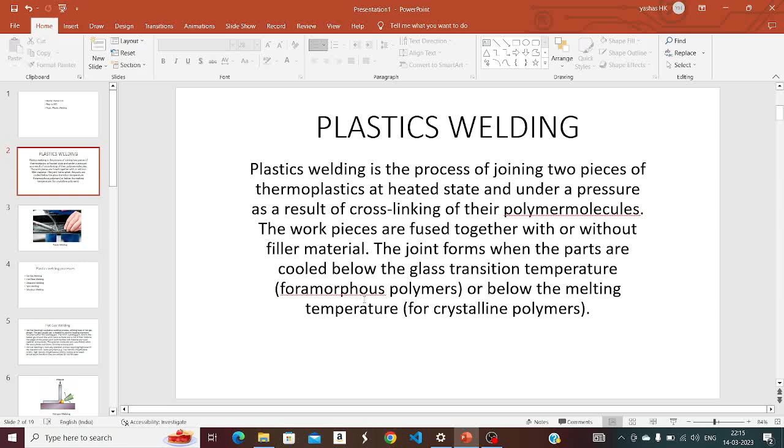Plastic welding is the process of joining two pieces of thermoplastics at a heated state and under pressure, as a result of cross-linkage of their polymer molecules. The pieces are fused together with or without filler material. The joint forms when the parts are cooled below the glass transition temperature for amorphous polymers, or below the melting temperature for crystalline polymers. This is how plastic welding is made.

There are five types of plastic welding: hot gas welding, hot plate welding, ultrasonic welding, spin welding, and vibration welding.

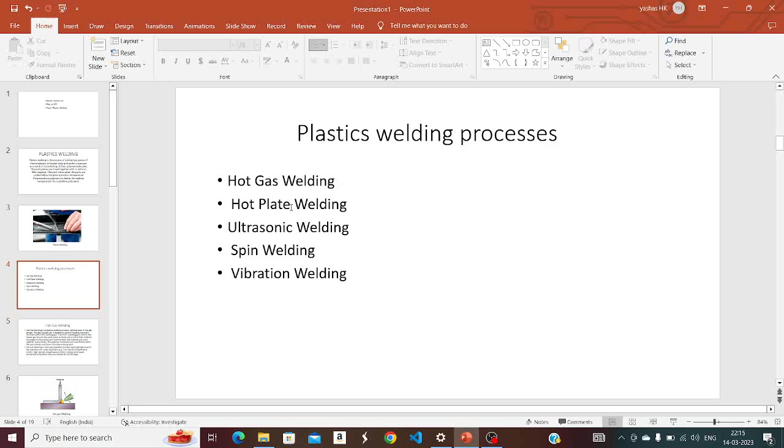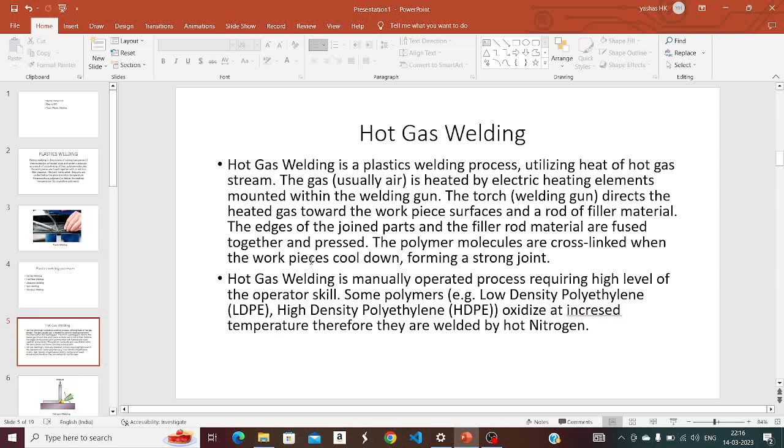Hot gas welding is a plastic welding process utilizing the heat of a hot gas stream. The gas, usually air, is heated by electric heating elements mounted within the welding gun. The torch, or welding gun, directs the heated gas towards the workpiece surfaces and the filler rod material. The edges of the joined parts and the filler rod material are fused together and pressed. The polymer molecules are cross-linked when the workpiece cools down, forming a strong joint. This is how hot gas welding is made.

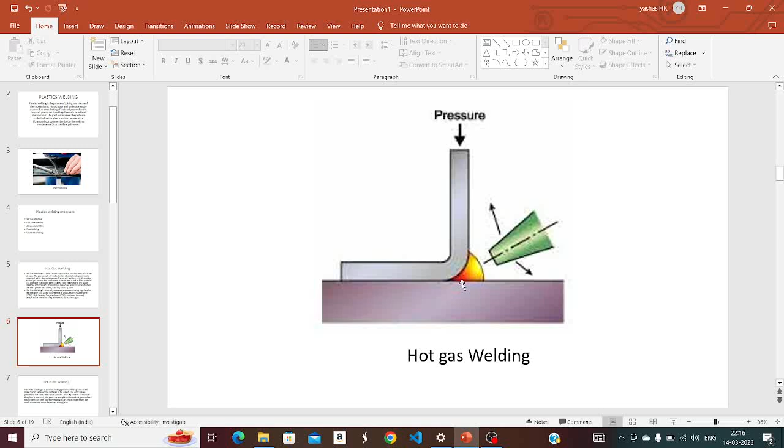So let's go to the second type of welding.

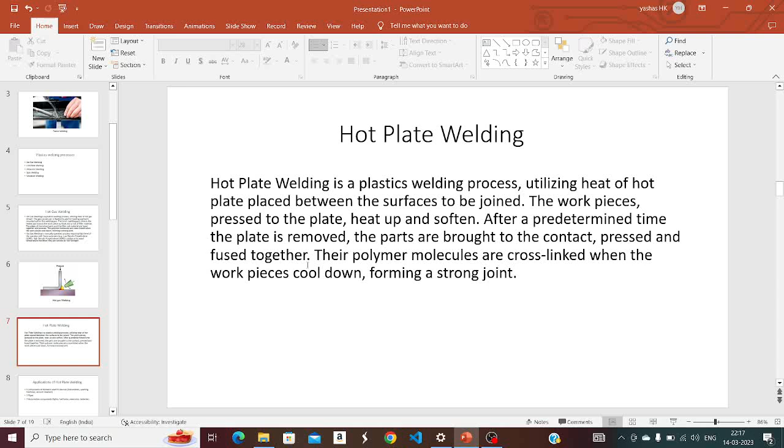The second type of welding is hot plate welding. Hot plate welding is a plastic welding process utilizing a hot plate placed between the surfaces to be joined. The workpieces pressed to the plate heat up and soften. After a predetermined time, the plate is removed. The parts are brought into contact, pressed and fused together. Their polymer molecules are cross-linked when the workpieces cool down, forming a strong joint.

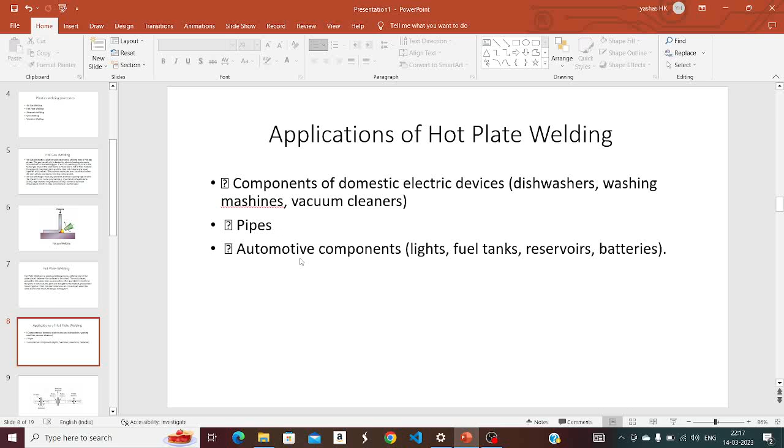Some applications of hot plate welding: it is used in components of domestic electric devices like dishwashers, washing machines, and vacuum cleaners, it is used to fuse or make contact with pipes, and it is also used in automotive components like lights, fuel tanks, reservoirs, and batteries, and many more.

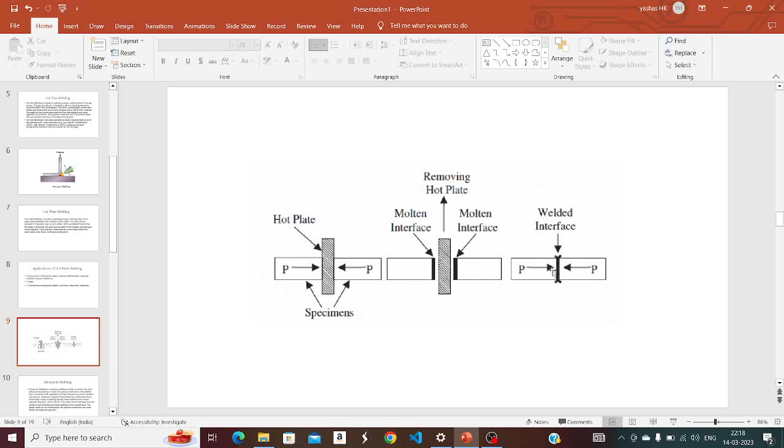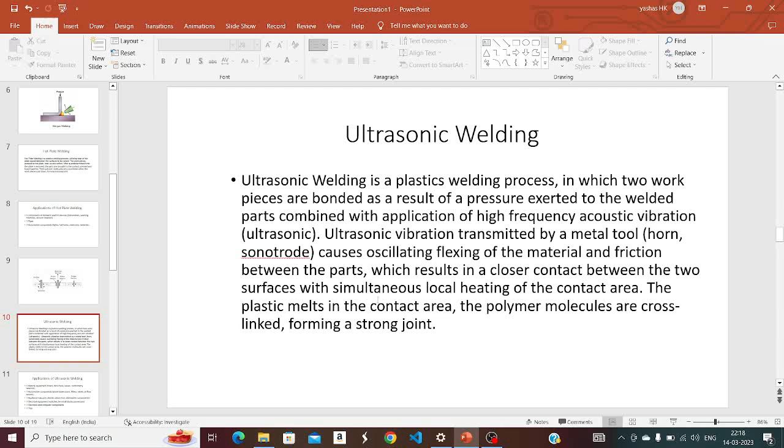The third type of welding is ultrasonic welding. Ultrasonic welding is a plastic welding process in which two workpieces are bonded as a result of pressure exerted on the welded parts combined with the application of high frequency acoustic vibration, that is ultrasonic. Ultrasonic vibration transmitted by a metal tool, or horn, or sonotrode, causes oscillating flexing of the material and friction between the parts, resulting in closer contact between the two surfaces with simultaneous local heating of the contact area. The plastic melts in the contact area. The polymer molecules are cross-linked, forming a strong joint.

Some applications of ultrasonic welding: it is used in medical equipment such as filters, face masks, valves, and cardiometry reservoirs, and it is also used in automotive components like glove boxes, doors, filters, valves, airflow sensors, and appliances such as vacuum cleaners, steam irons, dishwasher components. It is also used in electrical equipment like switches, terminal blocks, and connectors, and also in electronic and computer components, and toys.

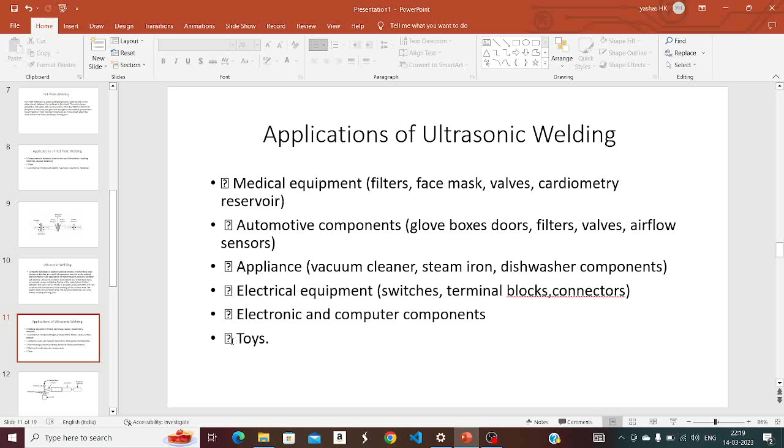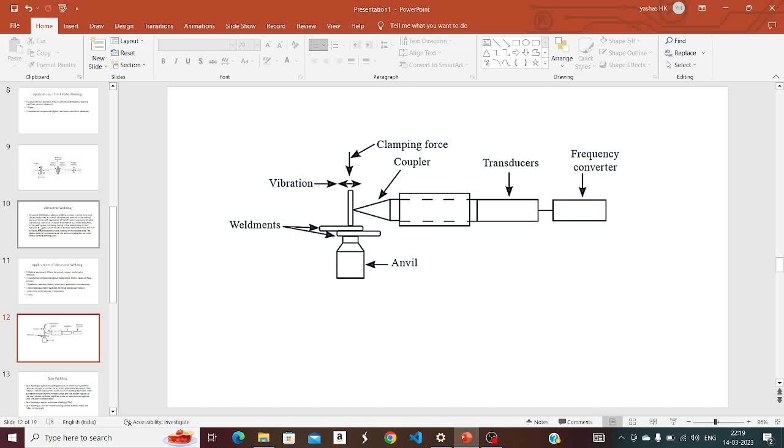The next type of welding is spin welding. Spin welding is a plastic welding process in which two cylindrical parts are brought into contact by friction pressure, with one of them rotating. Friction between the parts results in heating their ends. After a predetermined time, the rotation stops and the molten regions of the workpieces are fused together under axial pressure applied until the joint is cooled down.

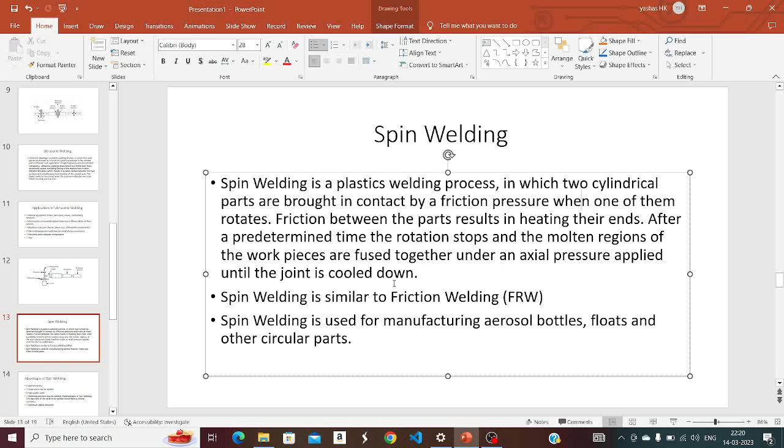Some advantages of spin welding are reproducibility, large parts may be welded, high quality welds, and oxidizing polymers may be welded.

Some disadvantages of spin welding are: at least one part of the welded pieces should have circular symmetry, and a minimum rigidity is required.

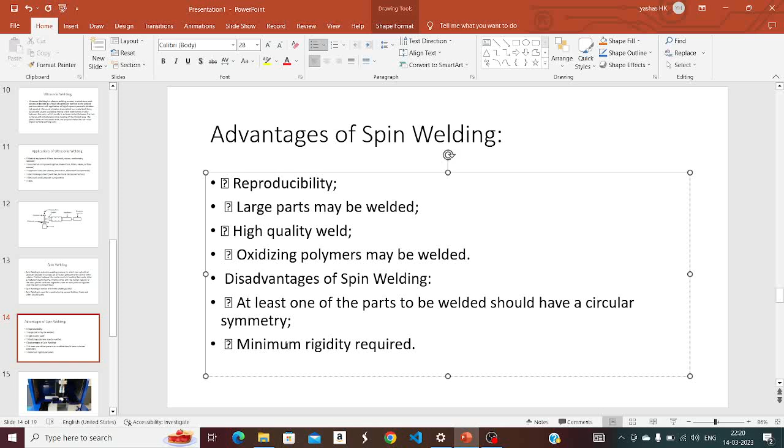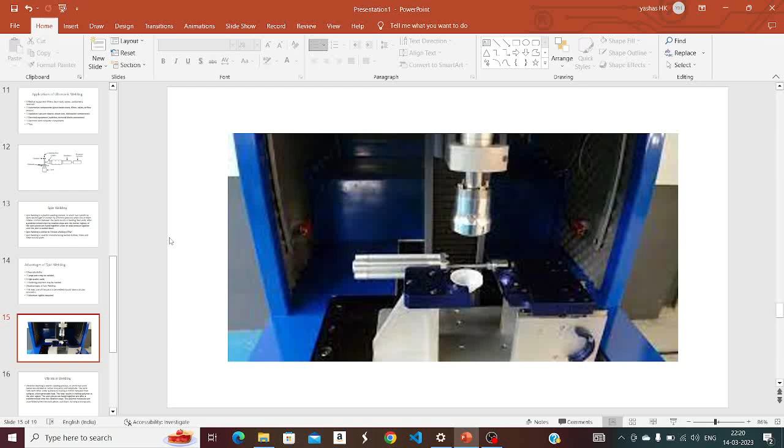The last one is vibration welding. Vibration welding is a plastics welding process in which two workpieces are vibrated at a certain frequency and amplitude. The parts rub each other under pressure, causing friction between their surfaces, which generates heat. The heat results in melting polymer in the joint region. The workpieces are fused together, and after a predetermined time, the vibration stops. The polymer molecules are cross-linked when the workpieces cool down, forming a strong joint.

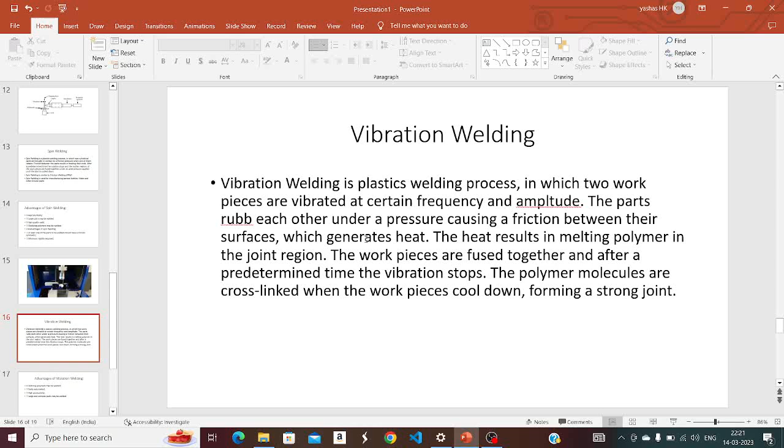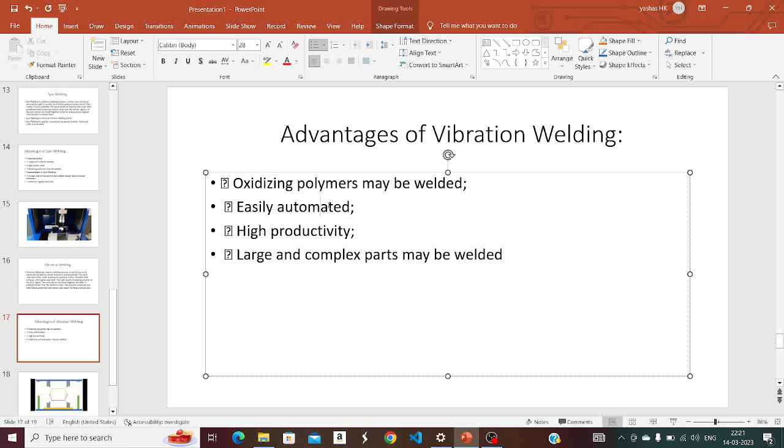Some advantages of vibration welding are: oxidizing polymers may be welded, it is easily automated, high productivity, and large and complex parts may be welded.

This is a video representation showing how, by friction, the welding happens. This is how vibration welding works.

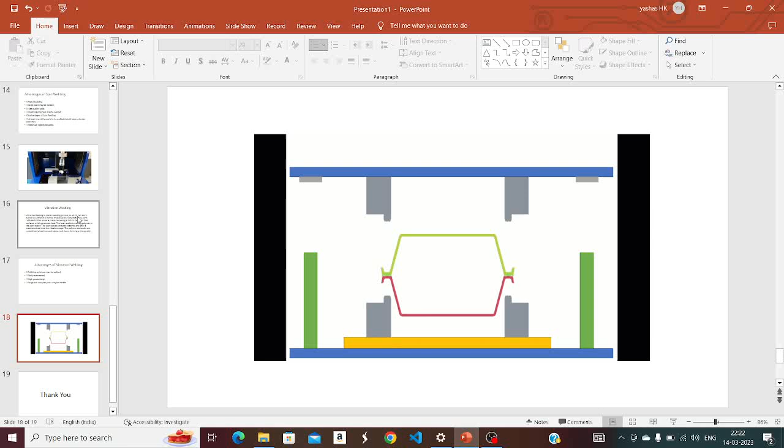So these are the five types of plastic welding. I hope you get it. Thank you.